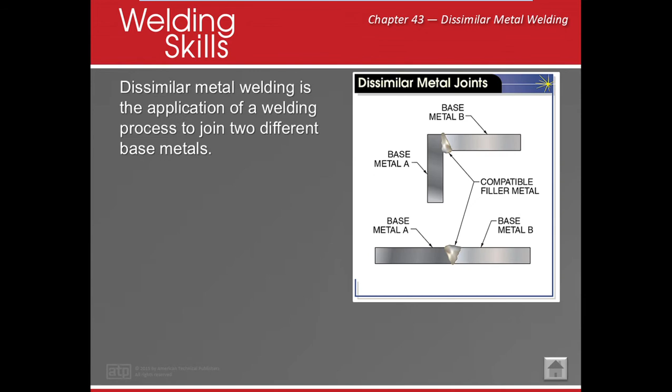All right, so dilution. Pretty much, dilution is how much of the material can be kind of sucked into the weld, okay? And we need to make sure that it mixes together with the base metals. It doesn't need to be overly mixed, but we need to mix the materials together. Otherwise, it just won't stay. So around, I think, between 8 and 15% is about average dilution.

So pretty much, we want to think about it in coffee and sugar, okay? Those of us who put too much sugar in the coffee, it kind of sinks down to the bottom and it doesn't dissolve. Well, that's kind of the same thing. We need to dissolve this filler metal into our base metal so it stays together so it doesn't crack. That's really what we're talking about.

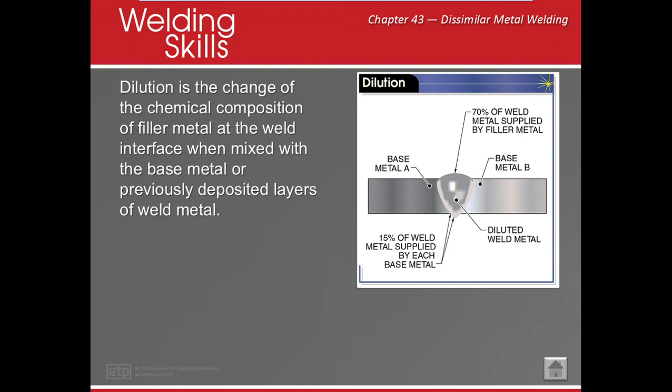Now, buttering. So any of you who has done pad welding, this will help you out immensely. So really, when we do buttering, what we're doing is we're actually putting a pad weld on the bevel. Now, what does this do for us? Well, let's say I have a material.

One material melts at 100 degrees and another melts at 500 degrees. Well, we know that the 100-degree material is going to melt faster and easier, right? So we're not going to put so much heat into it. But it's not going to be enough to get good fusion with that metal that melts at 500 degrees. So what we're going to do is we're going to butter it. And we're going to butter that one that's going to melt at a higher temperature.

And then we can even butter the one at a lower temperature. That means I can put a lower temperature with that same filler metal, but I don't have to put it so hot. And then I can join them together so that I can have a nice, evenly distributed filler without worrying that I'm going to burn one side and melt down the other, okay? Or I can just do one side and it works very well. It really helps a lot.

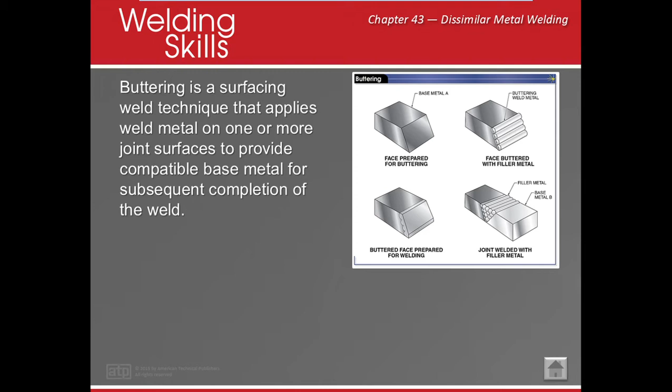Okay, intermetallic phases. Pretty much it is non-metal and it's almost like glass or little pieces of slag that get stuck in it. Pretty much what it's saying is, oh, hey, you're not the same. And it kind of grows these funny jagged things and it makes a crack. Okay, that's really what an intermetallic phase is, okay?

It's because it's not the same and it's all of these little parts in the chemical makeup of the weld that isn't metal. And it's going to make a crack, okay?

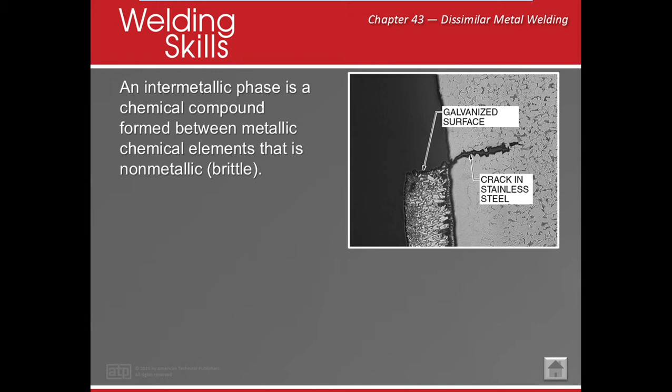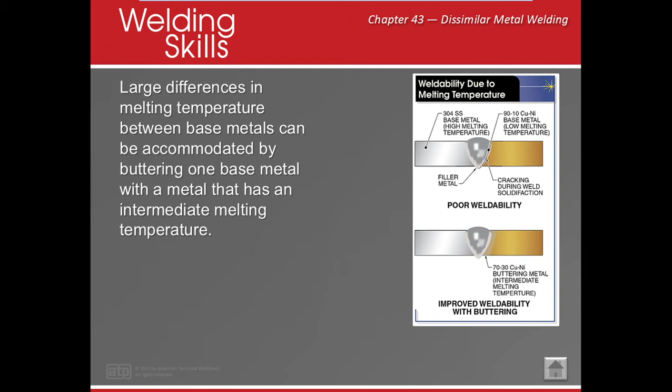All right. So what we were talking about right now, weldability, okay? Changing the filler metal as well as the buttering to make sure that things weld together. Galvanic corrosion.

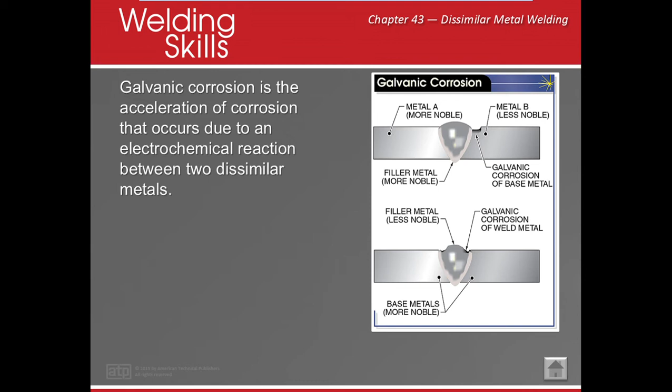So pretty much what this is saying is that if I'm using dissimilar materials, they can electrochemically corrode, like seawater, okay? And it creates this exchange of ions, and it can corrode the less noble material. So really, it's kind of like a 9-volt charge going back and forth of these materials, okay? Because another ion, like seawater, allows it to go back and forth, and it starts to corrode away.

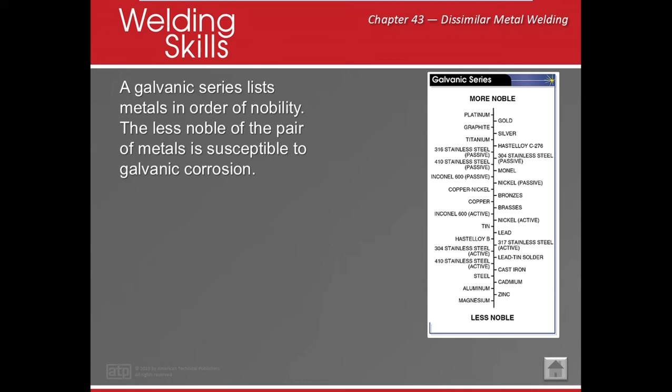So here's like a series in order of nobility. So like maybe if I had aluminum and titanium, and we put those together, the aluminum would be more susceptible to galvanic corrosion, or that electrochemical exchange of ions, and it would corrode. That's really what we're talking about. Okay?

Now, when we want to go from stainless steel to carbon steel, this is probably our most common that we're going to see. Okay? So we need to pick things that are going to work together. Oh, come back here. Okay? So we want to look at steels that are going to work together. So we have, let's look at this, 304 or 316 stainless steel. We're going to look for something like a 309. We're looking at those same compositions.

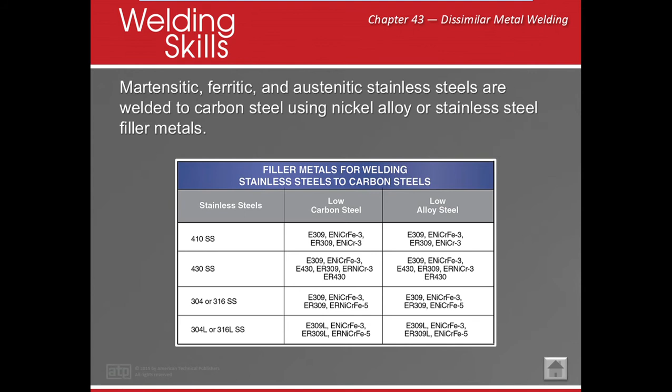Now, if we're working with different materials, we're going to use what is called a ferrite number. And really what it tells us is how much nickel is in there, how much chromium is in there, and how ferrous is it. What is ferrous? How much iron is it? And we look at the percentage, and we want to match the percentage with the filler metal that we're going to use. Really, now it's pretty much open an app, look at a different chart. These charts aren't really used that often anymore, but it's important to know what they're about.

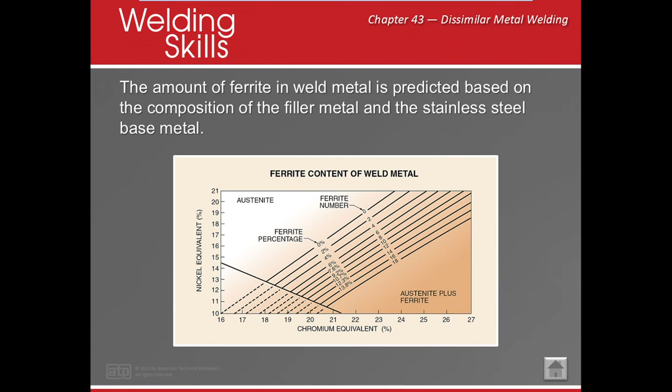Okay, nickel alloys. Of course, we can weld it to carbon steel, stainless steel, copper. Remember, nickel alloys are in 3,000 different types of alloys. So we can have a lot of different ones. But we're also going to look at Fe, nickel, chromium, iron. We're looking at all of these things, and we're going to find something that works for both of them. Okay, so it's saying, if I'm going to go to a 304 to an alloy 400, here's some of the ones that I might want to use.

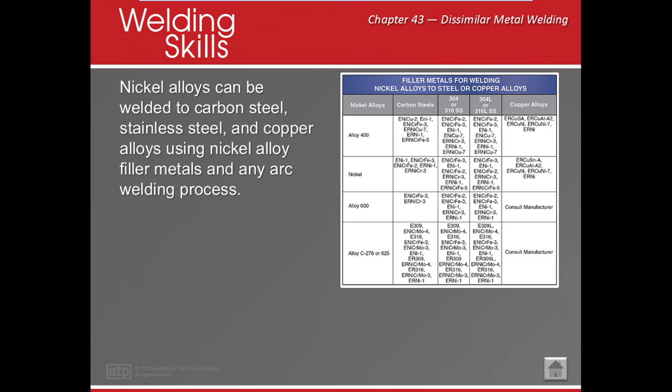Nickel to stainless, right? So they're pretty much relatively the same, but we want to look and make sure that we're taking a little bit from box A and a little bit from box B, so we can make sure that they make C, the compatible filler metal. Okay, so of course, copper to steel or stainless steel. Same kind of thing, except there's not much of a selection here. The most common that you're probably going to see is probably like an aluminum bronze or a brass.

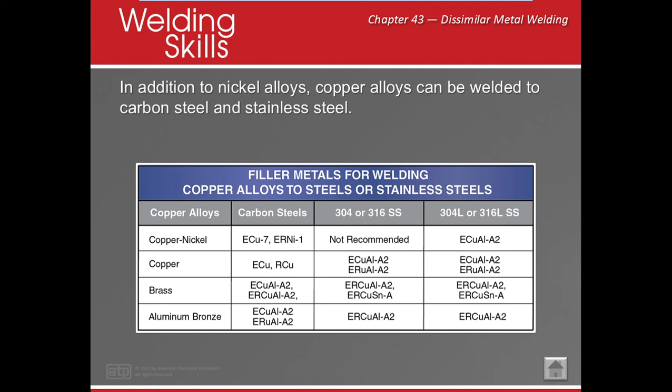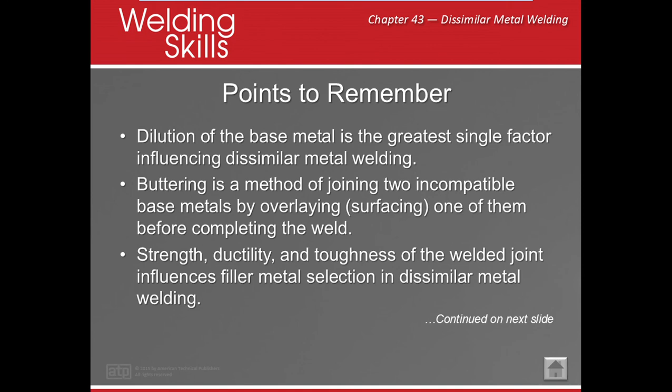Okie dokie. So, points to remember, dilution of the base metal is the greatest single factor. We need to make sure that they dilute and work together. We know that buttering joins two incompatible base metals by surfacing one of them or both of them to complete the weld. We know that strength, ductility, and toughness is going to help us choose the correct filler metal when we're doing this, okay?